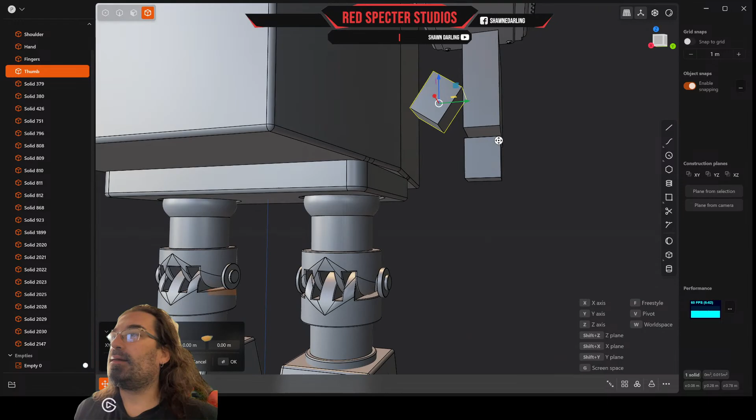Okay, that's fine there. And I think from the front I'm going to add some joint parts to this. We're going to use a two-point circle. Going to go from here to here, and I will add this onto the thumb. I think that'll be fine, and we can go to our faces, and I'm going to cue that to this, so we'll just pull that back and select the edge that it's going to snap to, like that. Great, everything's good to go.

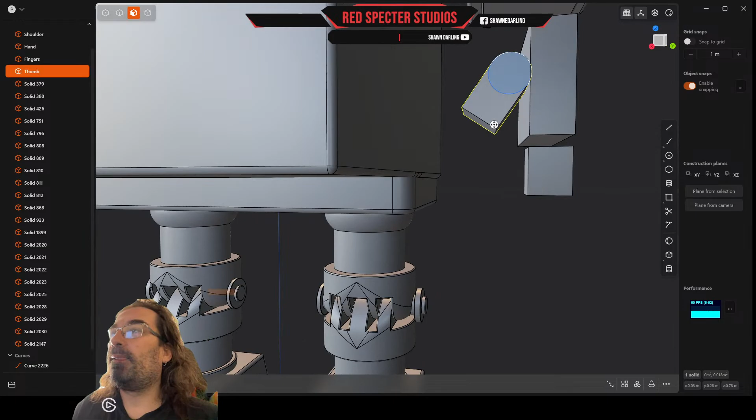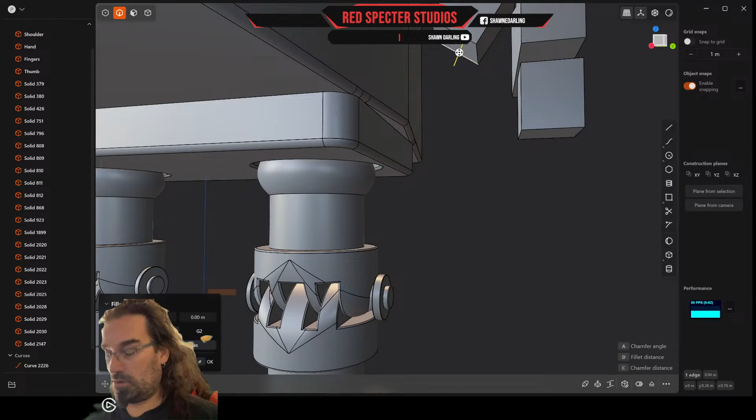And might even make this face here, let's see if it'll let me do this, but a bit smaller. Don't think I can do it that way, so I'm going to take the edges now and try to move the edges in a little bit, which it definitely lets me do. And I think if I select that one, pull that one, don't know why it's going up, must have grabbed it in the wrong direction, but pull that one in this way.

The point of that is so that I can add the circle to the bottom part here, and I guess we can do a 2 point just the same. However, got to get this to snap, which it has, and we'll now zoom back, which is in my opinion a flaw in the program, but it's fine.

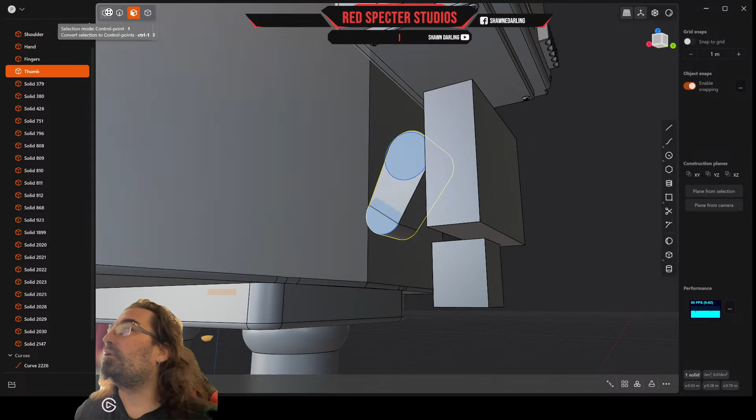And we can take this piece and we're going to cue that back using this, and we will pull that back and snap it to that far edge, and that will be done. As far as I can tell, that's good to go. It's got a little bit of an angle or something. I don't know what's going on there, but whatever works. And we will pull the curves off, I guess.

I don't really like the fact that this has a separate piece like that, so I'm going to undo. Seems like, yeah, I pushed in that edge. So I'm going to undo that like so. Then we're going to push this edge inward, leaving it flat from the front to back. I think that's okay.

And now from the front, I come in here. I'm going to get rid of this other curve. It's just distracting. We're going to take this, do a 2-point circle from here to here. Say okay to that. Zoom back out, which is my favorite. And extrude that backward. It's doing it as a separate object, but that's okay.

I will meld the two together here now. I'm going to go to Q, and say yes. And then we can get rid of this curve. And now you notice there's no line here on the front, which is what I was mainly trying to avoid.

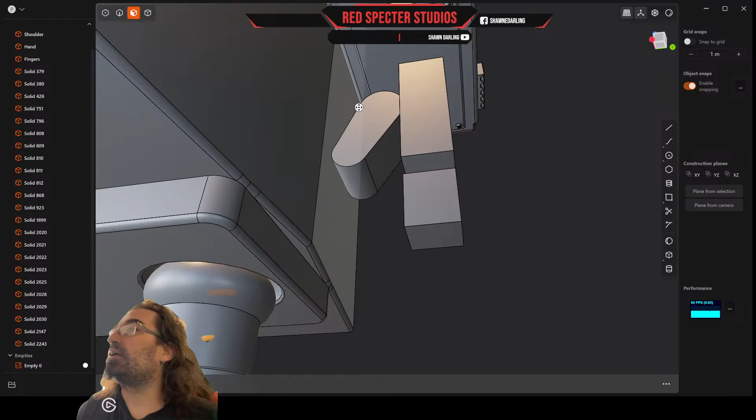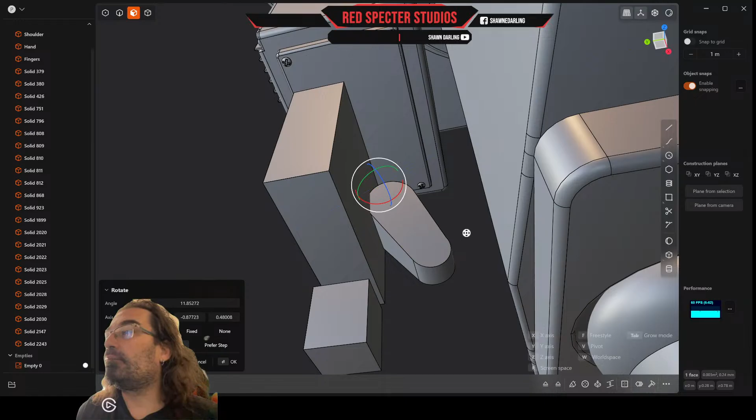Now I will tilt these in toward each other, so I can take this face here, do a rotate, V, from up here, and we can say you lean in that way, and then I can do the same on this back side. This just gives it a bit more flair. Rotate, V, and do it from this backside point as well, like that. You can see the thumb gets thinner as it goes toward the middle. That's the point of it.

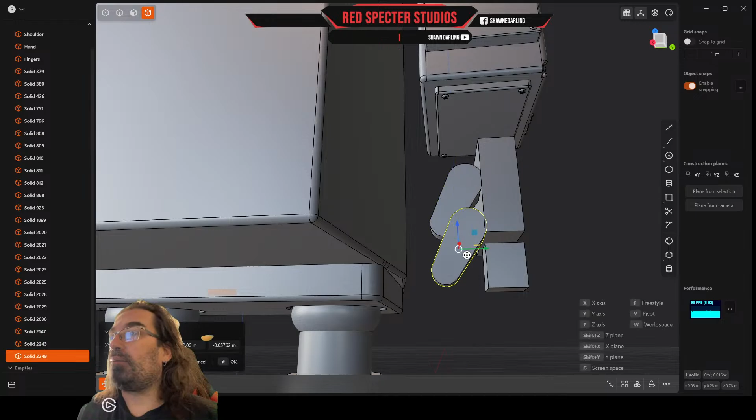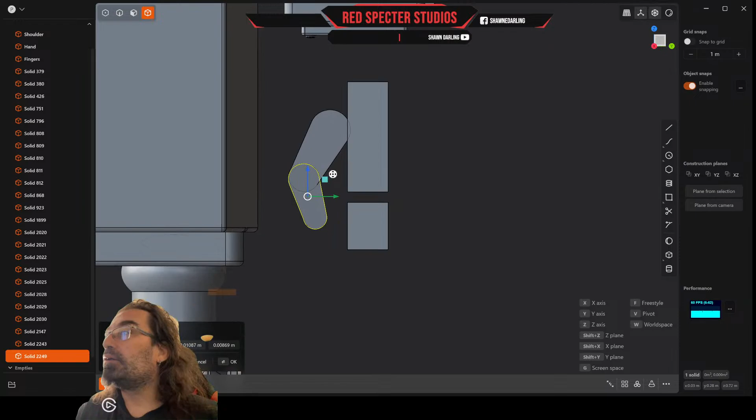And now, worry about the fillets here in a second. I want to take this piece of the thumb here. I'm going to duplicate it and pull this down and make this, just trying to save some little bit of work. Do it like so. And move this. We turn on, hopefully you can see, there we go, that's not so bad. Get as much of a real circle in there as possible, and that should be good.

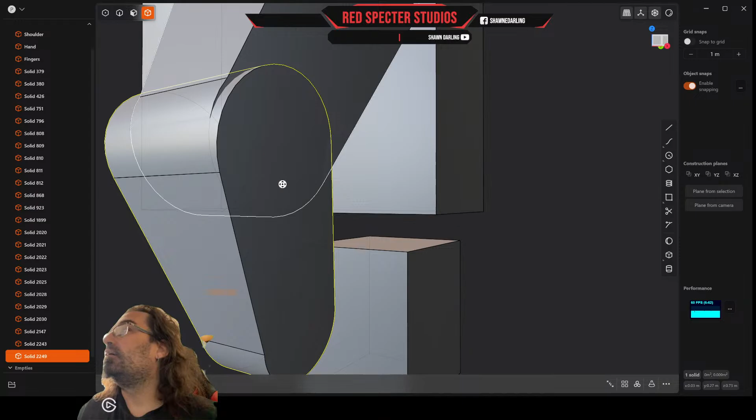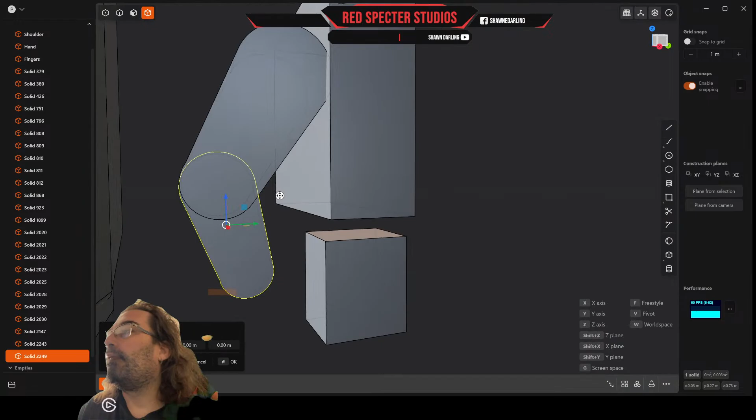And looking at it from the side here, I want to make it thinner or wider. I think we'll make it thinner this way. And then that way I can move this forward. It will sit pretty much in the middle of that piece. That looks pretty good. The front, let's just try to make that more of a circle. I think that works there. Because we're going to have to run a pin through this, and I'm just trying to get that in a more circular way. That works for me at the moment.

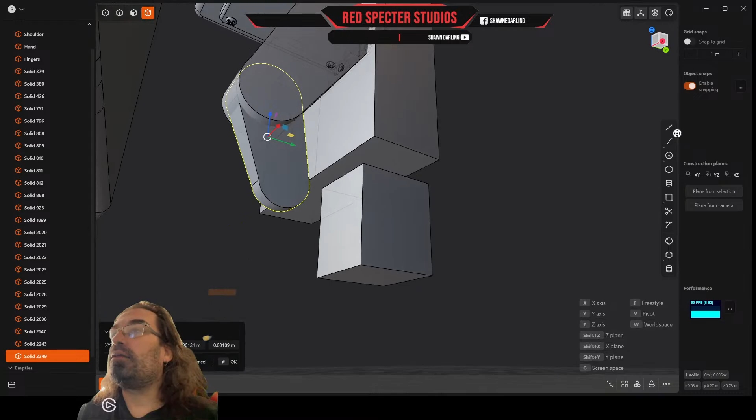Also, I think if I take a line from here to here, give that a cut, knife, and then I'll do the same on the back side here. From here to here, knife. I can draw those two faces forward and backward. Let's see if that works with just an offset. That actually isn't bad. I was just going to do the tip of the finger, but I think the circle's kind of cool. We'll do that.

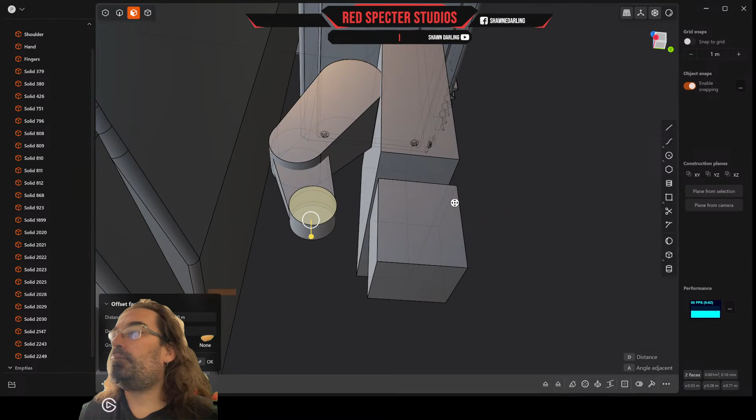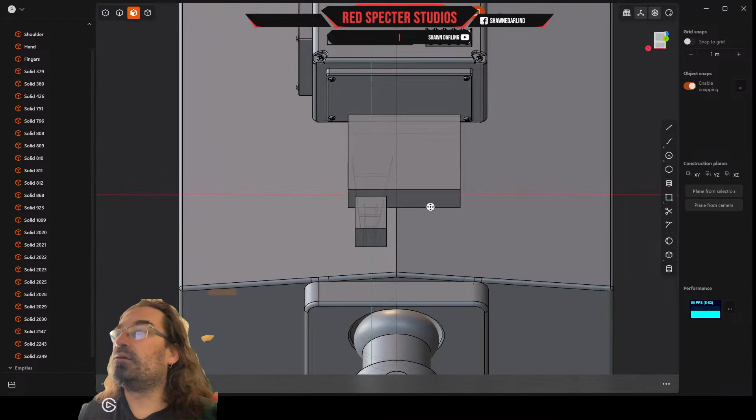We'll worry about anything else involving that here in a second, but what I want to do is carve out a slot for this thumb to fit in, and to do that I'm going to have to create a rectangle that runs off of that face. Let's see if I can even see that. Probably not. Let's just cut it anyway. I'm going to go a little bit up and outside of the actual piece that's there, and something like that. I hope that looks somewhat correct. I think so. We will have to size this now this way and move this down some. Hopefully that will be enough.

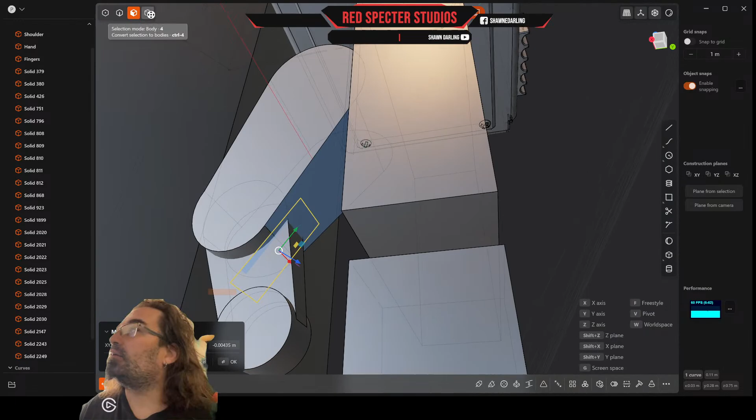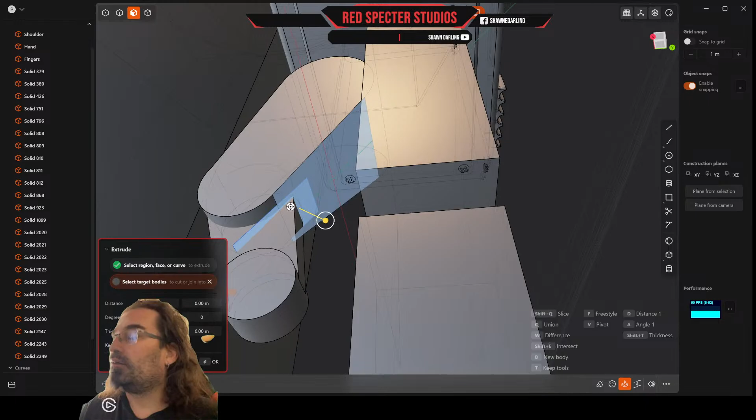Point of this is we're going to extrude that face. If I can grab it here, this face and this face is going to extrude through that. So W, use this as our target body, I hope. Pull that through. That is not what we want. So what we want is that. Extrude, W. Why won't it pick that body? Let's escape. Let's take those two faces now. It's curved, so we need to grab the curve, move that out away from it, and this should give us the ability to do what I was trying to do. We just select this, W, why won't it select that body? Very strange. Remove the plane. Okay, cancel.

Weird. It usually doesn't have this problem, but let's grab the curve, move it completely off any other objects. Maybe that's it. I don't know. And of course now it's not going to move it according to that plane. This should just work. I don't understand. So if I go through, okay, that's not working. So we're going to select this body. This should totally work. I don't understand. Probably can't cut with this curve, can we? Well, it says we can.

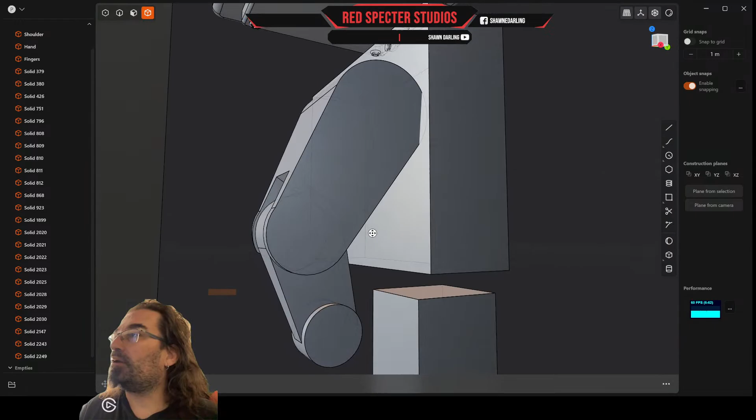Let's just do it. Delete all the pieces, and that works just fine. That's what we want. That looks like it clipped just barely, but you know what? I can probably offset this face really slightly in there. There you go. We got plenty of room for everything. So that's how that needed to be done. We're going to have to do essentially the same thing to this piece once we get our joint built up here, which shouldn't be too difficult, I'm hoping.

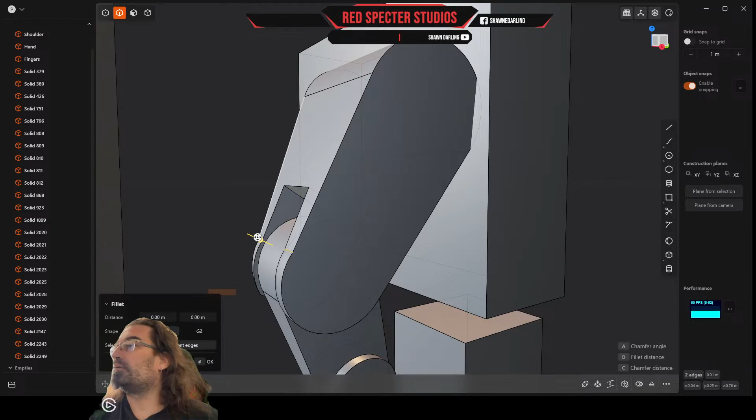And these edges could probably be beveled out slightly, just like that, to make them smooth. Those are already smooth and tangent in the front.

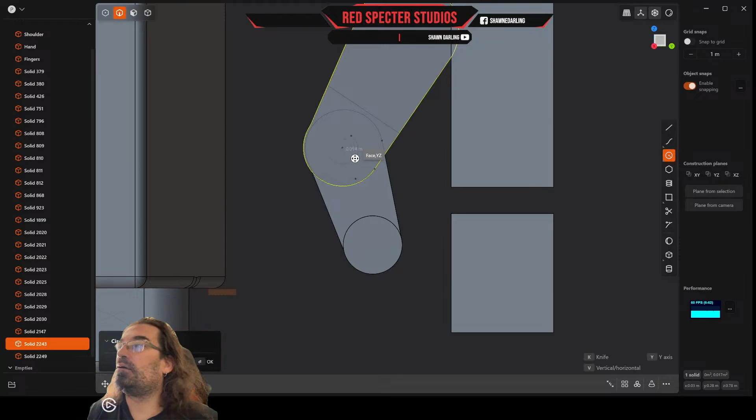Okay, so let's work on the thumb joint here. We're just going to drill a hole here for a pin. So this is going to be about that big. Works for me. Going to not delete that curve for starters. We're going to move it out in front. Going to take the face. Well, actually, yeah, we're going to take the face. We're going to go W, and then we're going to select this object and this object and pull that through. And now we have the hole through everything.

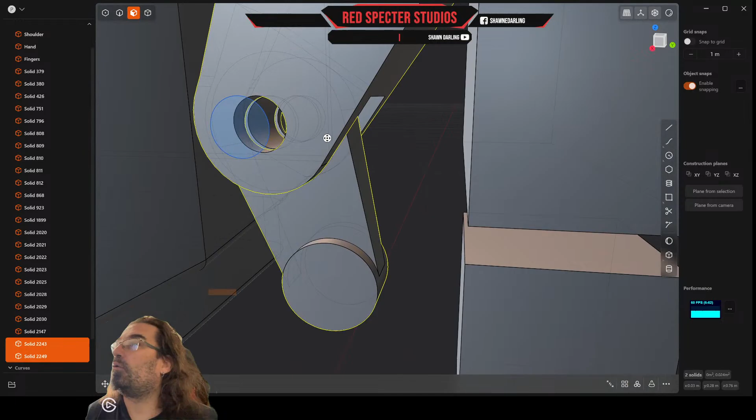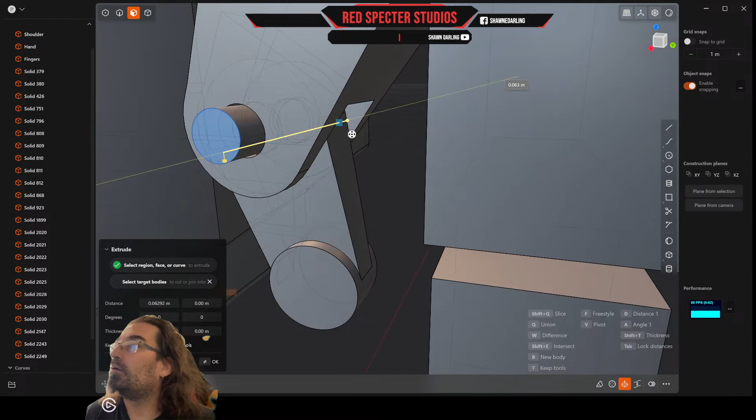Then we're going to take that curve, make it slightly smaller, SS, a little bit smaller. There you go. And we're going to extrude that as a new body through everything like so. And then I can work on the length of it after the fact. We don't want an extrude, so therefore we need to get rid of that curve and just offset the ends essentially like so. And this one to the same approximate distance there.

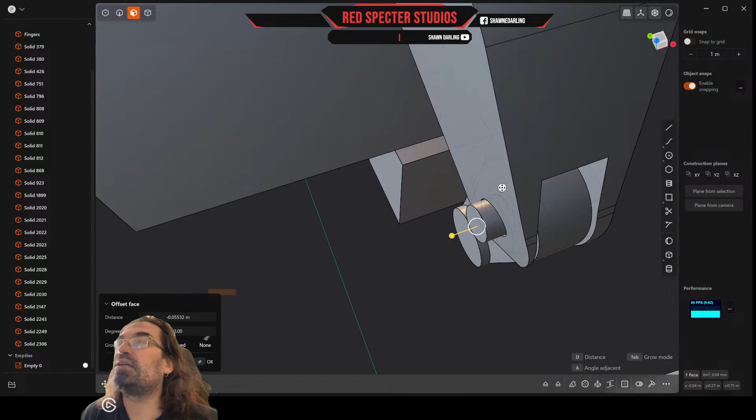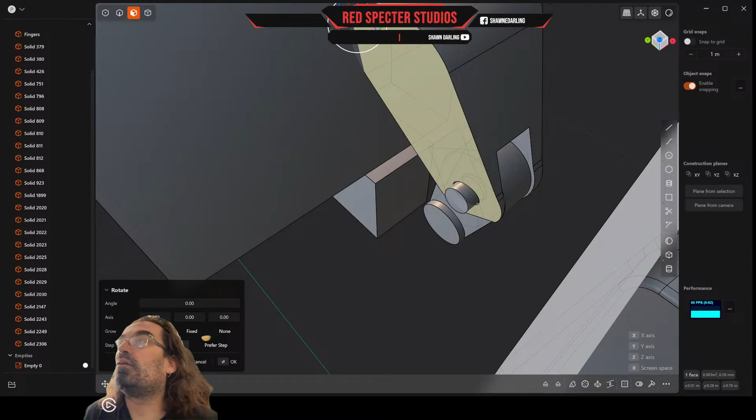It's looking like, ooh man, I chopped my finger there a little bit too much, so I'm going to see if this program, being as cool as it is, will fix this, and I think it will, by allowing me to angle that back out. We'll see. This will be a good test. So I'm going to go like this. I'm going to rotate this, and we're going to go from a custom rotation point. Let's try that right there, and we'll just rotate.

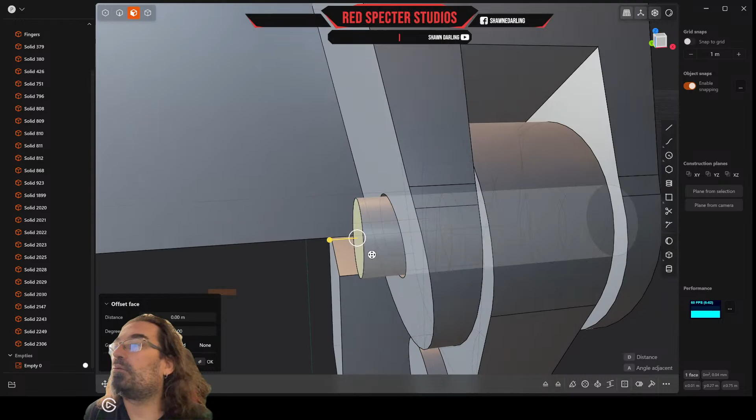Look at that. I brought the thickness of that joint right back to this bottom piece where it was cut off. How awesome was that? Yep, I'm in love. Okay, that saved that, made it perfect. Let's go ahead and pull that out so we can do what we need. We're going to offset this curve here inward to there. And we're going to offset this curve inward to there.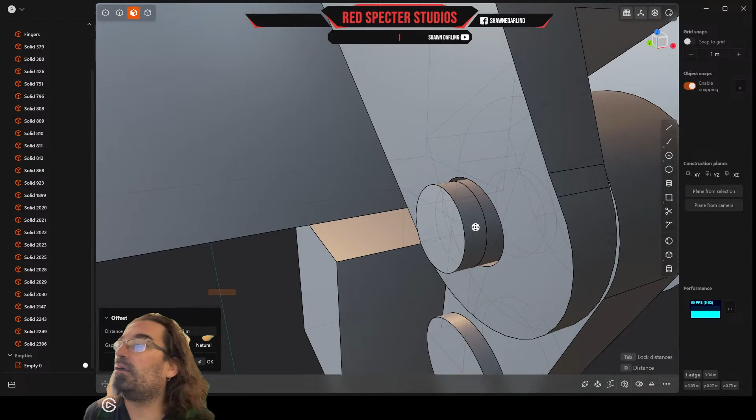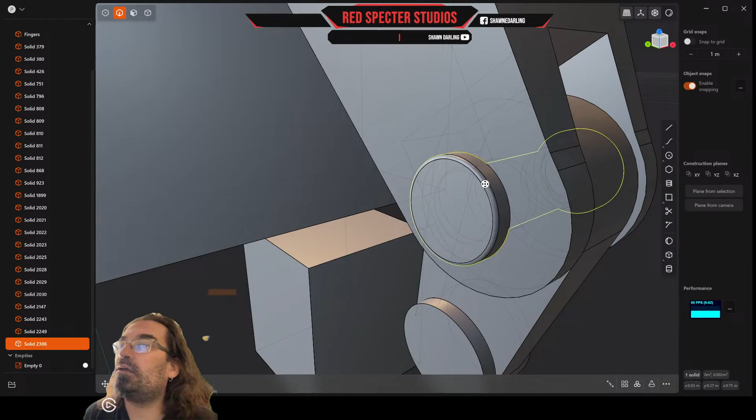Perfect. And we're going to select the face here and the face here, and we're going to offset those out to create our heads of those pins. And then all we got to do is our fillets on those, and we're good. Let's just go ahead and chamfer or fillet the inside. I say go ahead and fillet those. Why not? Cool. And works for me.

Maybe a little detail in the middle. We don't need another circle. We can actually just offset this edge toward the center. We'll do the same thing on the back side at the same time. So we just go O and go up. It's not going to let us do them at the same time. That's cool. We'll go here, O, something like that in the center. I just want to get the other one approximately the same size. Come on.

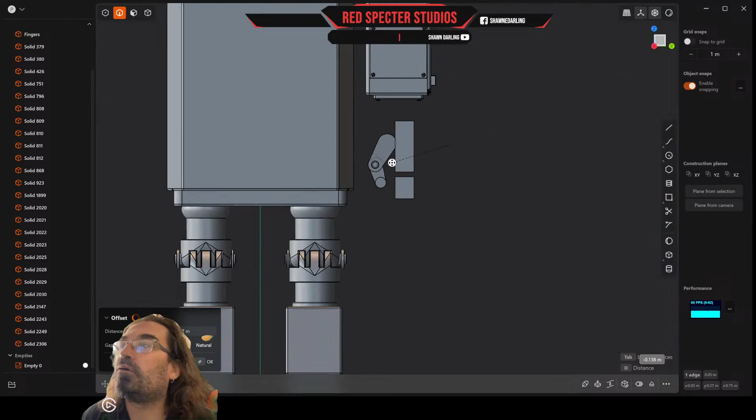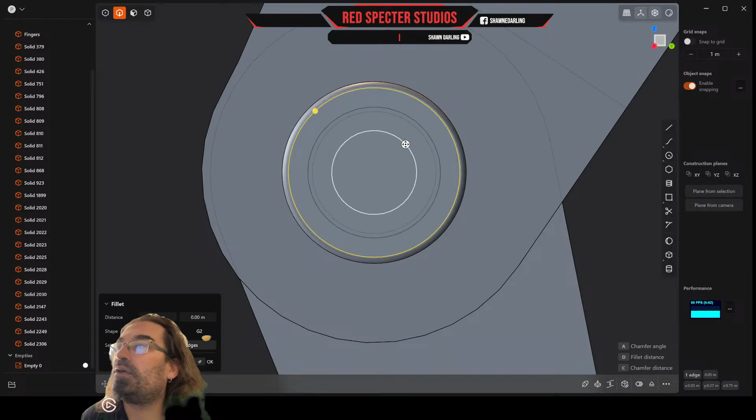So we'll select this edge, O, about like that. In fact, we can look through here if we need to. I will undo that offset. Oops. And have a look. I need to also turn off my see-through for the moment, because we're going to offset this ring. That should be to this. Yeah, it should be to that. So offset that one to, I think we can snap. Nope, we can't. To there. Looks great.

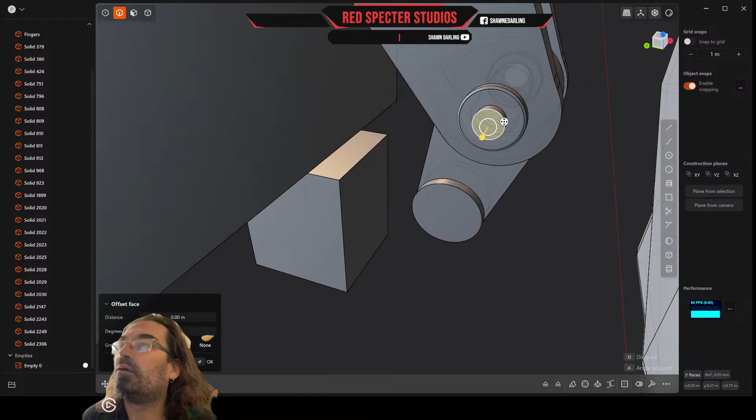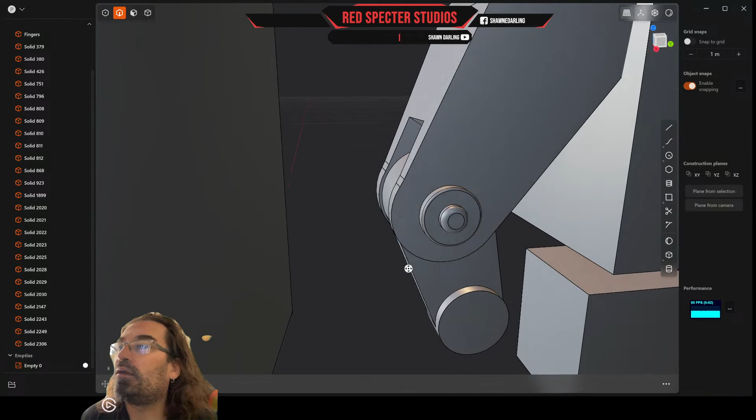And now with those both offset, man, that zooming thing is killing me again. I can select the faces, front and back, and pull those out, and then select their edges. I should turn off my, there we go, and even make those have kind of a much roundier point there, and that should all be one object now. Yes, and yes, that pin is finished.

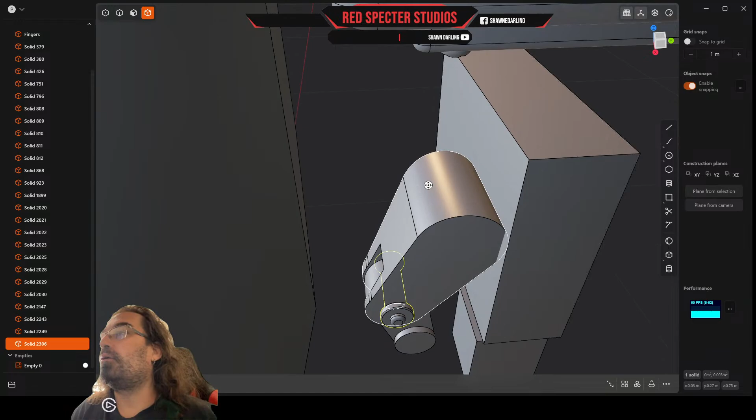Okay, so let's make the fingers cool. I need to put another 1 or 2 slots here. I'm going to go with 1. It's going to save lots of time to do it that way. So I'm just going to draw a rectangle. Let's do a central rectangle right here.

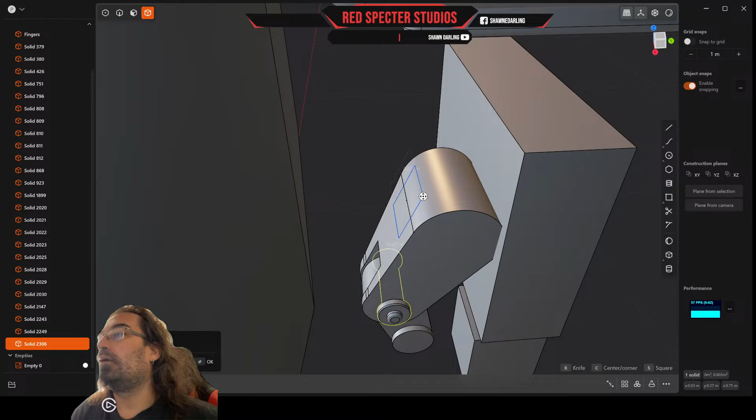And if I need to, I can move that up. Oh, you know what, you can. Let's move that like so. That should be enough. And then we can take the face that we just created and we can difference that against that and pull this all the way through. And it wasn't enough, so hang on.

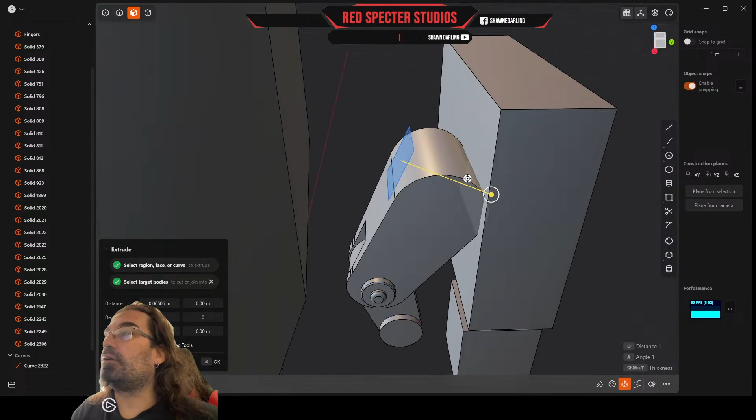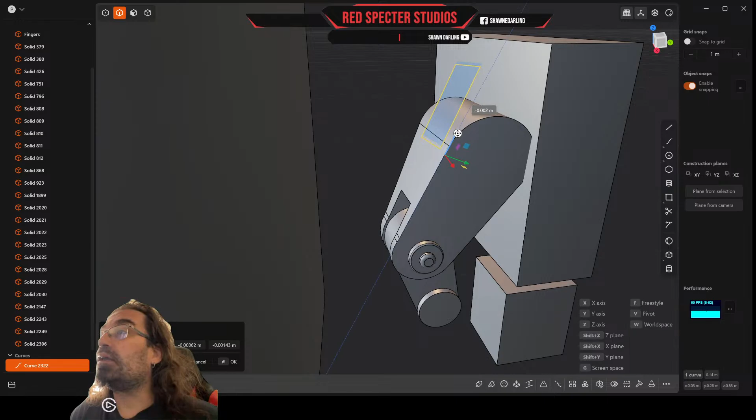We will take that curve again and move it. Whoops, that's material. And move it. We have to do the, there we go, the custom. That should be fine. I think I'm going to scale it some more as well. So scale V, we're going to scale on that same axis there. There we go. I'm going to move it again. We're going to do it on this axis again, because I think I need to be below this a bit.

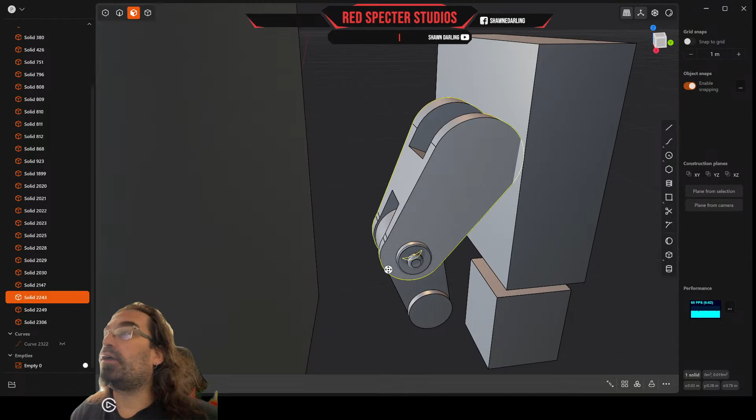And then I can W, select this and pull it through. That should be all it needs, we're hoping. I'm just going to save that curve for now, turn it off in case I need it. And then I need to make a piece that sticks out and basically becomes the central part of that. I'm wondering if I should do the hole first, just so I get a central location on that.

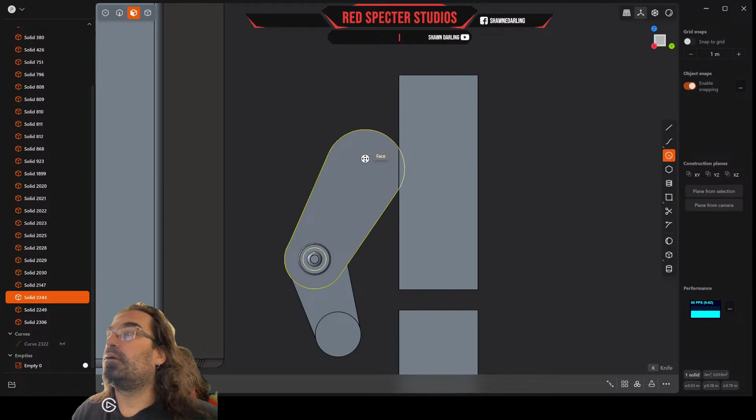Snapping is on, so how come I'm not getting a snap to that curve? He wondered. That's okay. It might be coming on. Well, I don't think so, because there is nothing snapping in the center. Okay, so is there anything that'll snap to the center? Because that's really what I need to have happen here. That might be because that's in an angle. Yeah, that's probably what it is. So from front view, nothing will snap because there's nothing perpendicular to the camera, parallel to the camera.

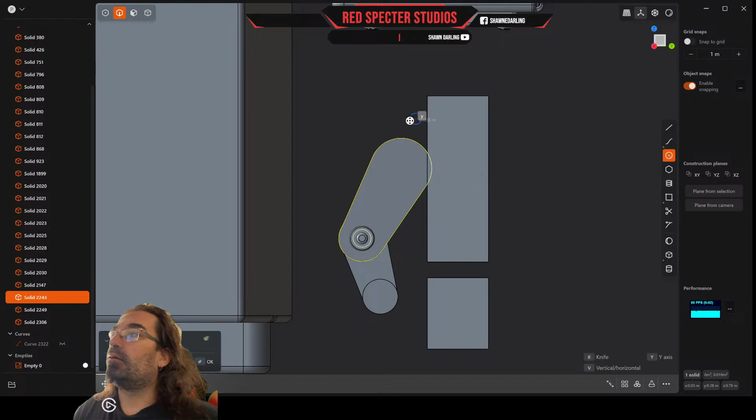So I may have to say, and this may throw off the whole thing. Nope, can't do it that way. Okay, so what is in there? I can do an offset of this edge and then continue from there, I guess. We can try that. So looking from the front, I'm just going to select, oops, undo. If I make an offset of this edge inward to where about my pin's going to be, let's do it like that. I'm just worried that it's going to be hitting the bottom of that area, but that might work.

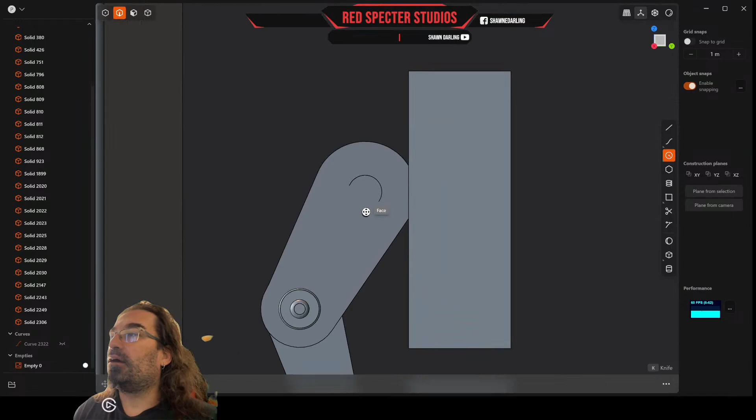We'll check it out. And I put that there just so I can use the center of it as a guide. I don't know if that will also make a guide for me, but it will not. But I can do this, which means I can find the middle of this line. I can come down to the middle of this line, and now I do have a center. In fact, I can also go from here to here, and with that I can place my center there if I wanted to. And let's just say I make that post about that big on this finger.

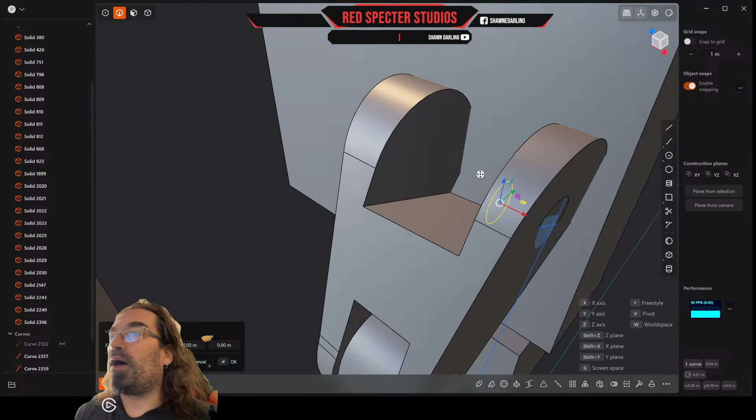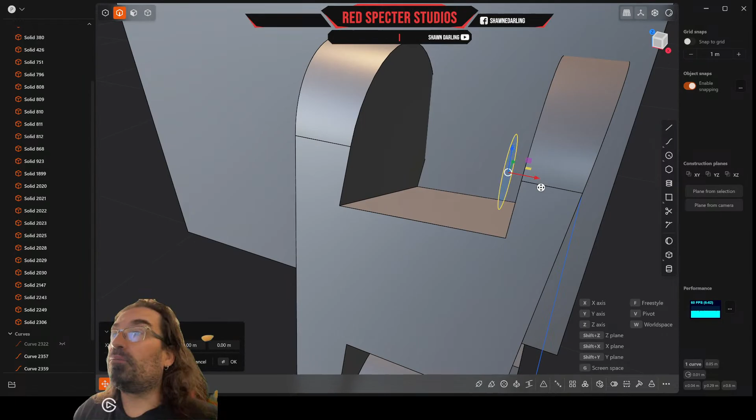And let me back up here to see where we're going to wind up on everything. I think that's going to be more than okay. I'm going to grab this. If you can see, it's not going to intersect. And this is what I was worried about, it intersecting with the bottom. So I think that can even be bigger because it's not going to touch that bottom. So SS, move that out to where we've got clearance there, and we will pull this forward. So now I know that that will work. If I wanted my pin that large, we could do that. I think that's fine.

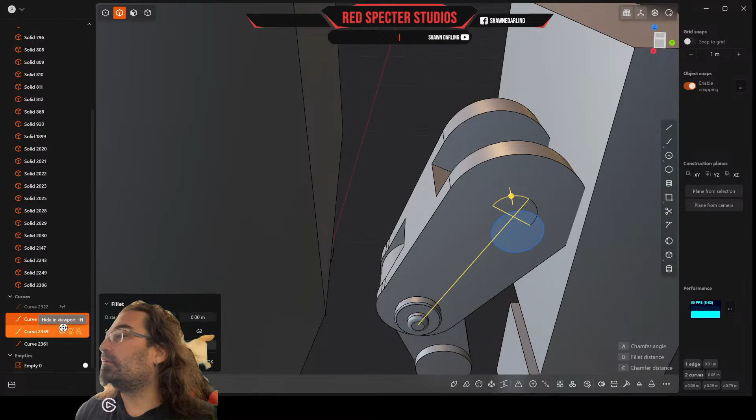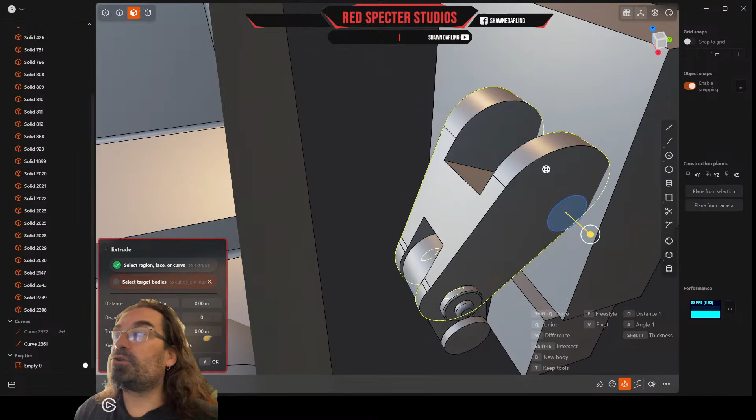All right, so all these other helpers here can now go away. Let's see. That's the curve I don't want to get rid of. These two I can. And what's up with these? Those two can go away. And then this, being placed correctly now, we're going to subtract from this and just pull right through. That's okay, I guess. You know what? I don't want it there, though. I actually want that higher up.

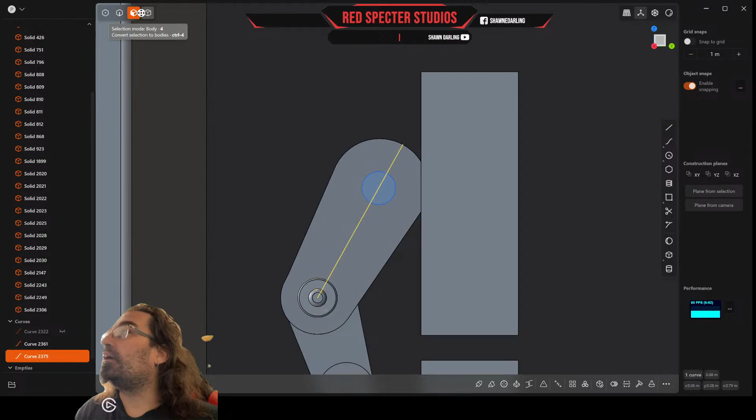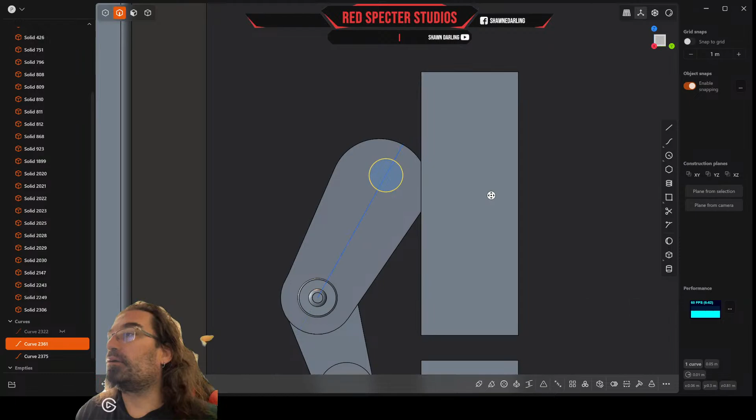So with that being the case, I will make this line again. I will take this curve now, and I will move it, grab, and we're going to use a custom move line. So we'll use this line. And so now when we move this up, there we go. Perfect. It's a little toward the top, but I like it better. We can now get rid of this other line. It was a great help. Thank you, bud. And we're going to select this face. Let me zoom out so I can see what we're doing.

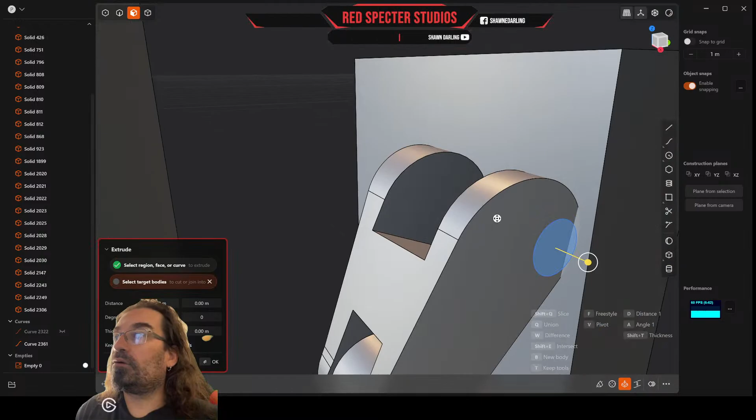W, select this guy, pull this all the way through, and now we have the hole where I wanted it. We can get rid of the curve, and we're good to go.

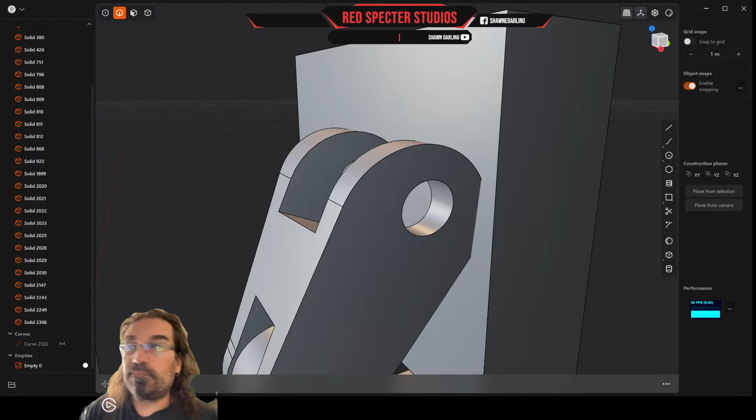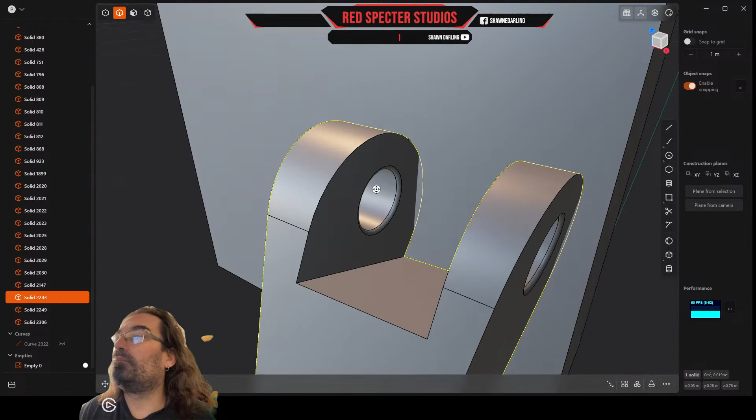I'm going to do some fillets on these curves. I don't think they'll be seen, but it's good to be thorough. We'll do those like so. I'm going to leave that for the moment. And now we need our pin for here. Perhaps I can borrow the pin we already created, which would be cool.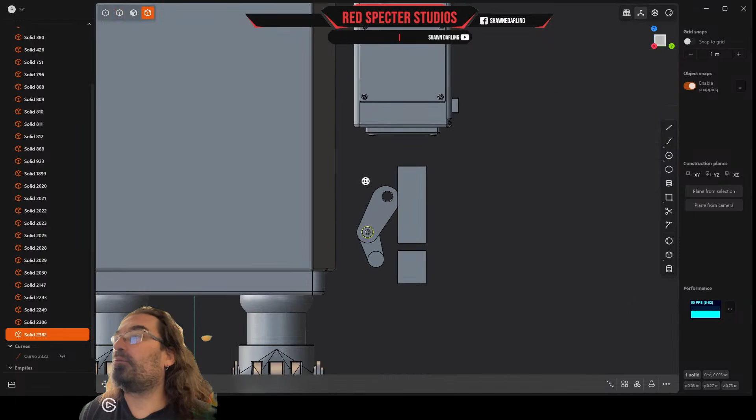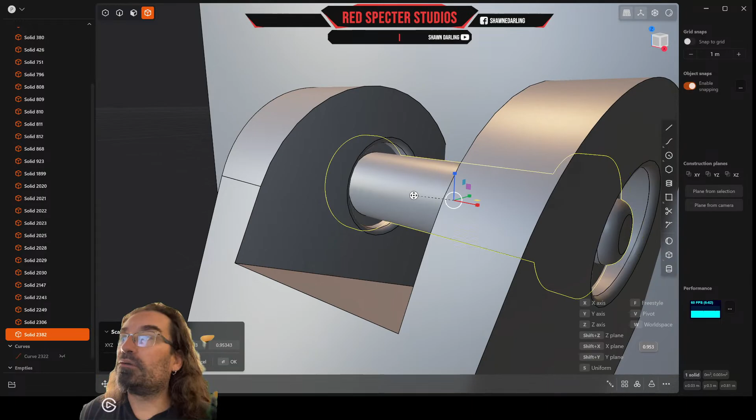So we will Shift D that. From the front now, I'm just going to grab it and try to move this. It's trying to snap to the edge, which I don't really want. Close enough there. The whole thing looks like it could be bigger, so we'll scale that to here.

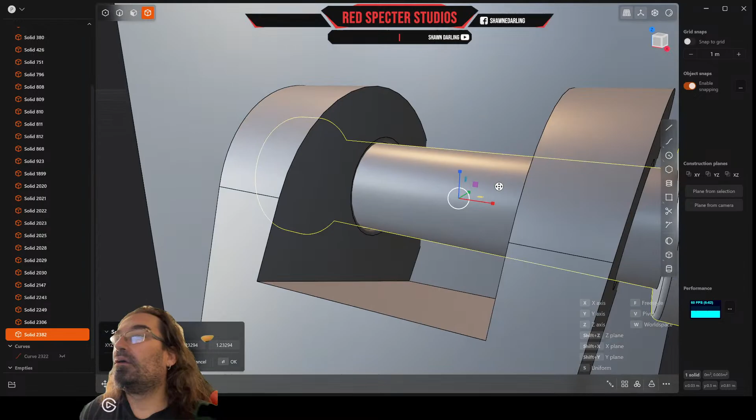Let's scale it down just a little bit now to where I can see like this. Then we will scale it out to some degree. The ends are not correct, but maybe I can manage those. We're going to grab it, move it this way, and then scale it in slightly. And I think we just live with that. Cool.

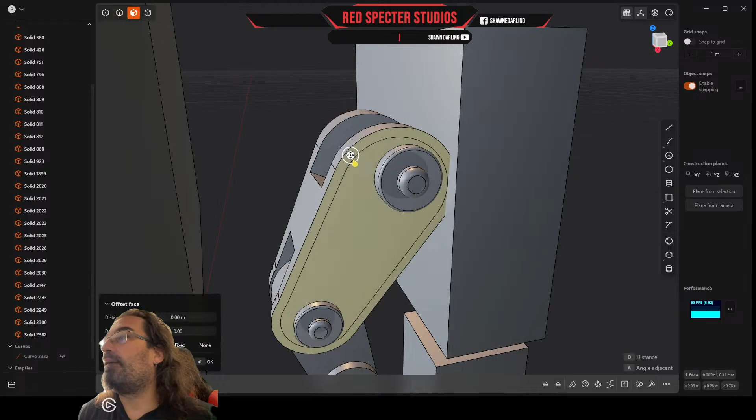And then I think, just to dress the fingers up a little bit, or the thumb, I'm going to inset a ridge here, an edge. I'm going to take that face that was just created from that, which it's not working that way, strangely enough. I don't know why. Why would that be the case? He wondered to himself. I don't know why, actually. Maybe we'll do this one side at a time.

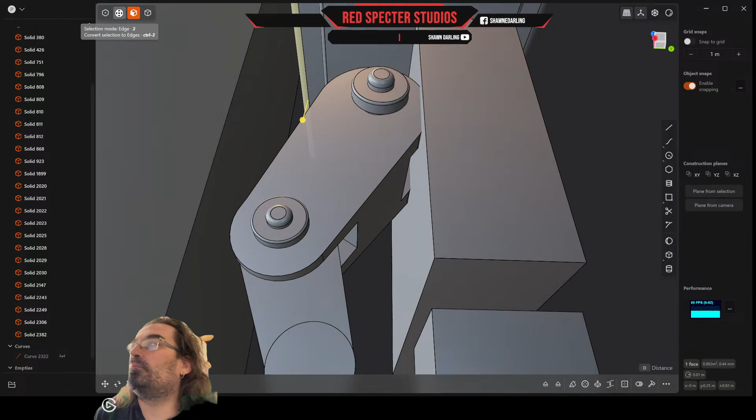I'm talking too much. My voice is getting shot.

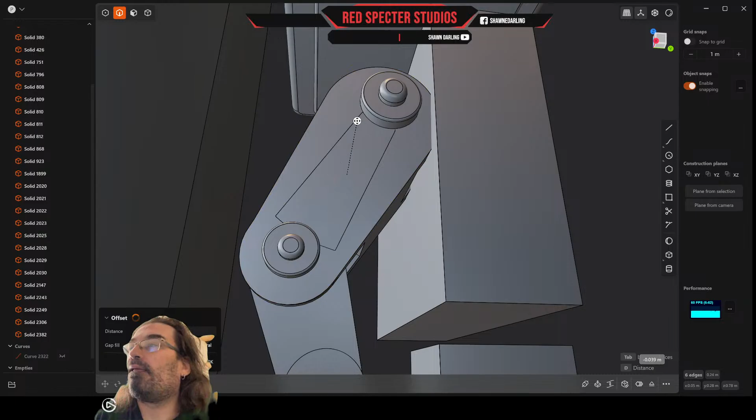Let's try this just on the one side. I don't know what just happened there. I selected a face I didn't mean to. We will select this face. We will inset it. And suddenly it's not insetting. I don't know why. I only want to inset this particular edge I've got here. Never had this problem before. It's working now though, so that's what counts.

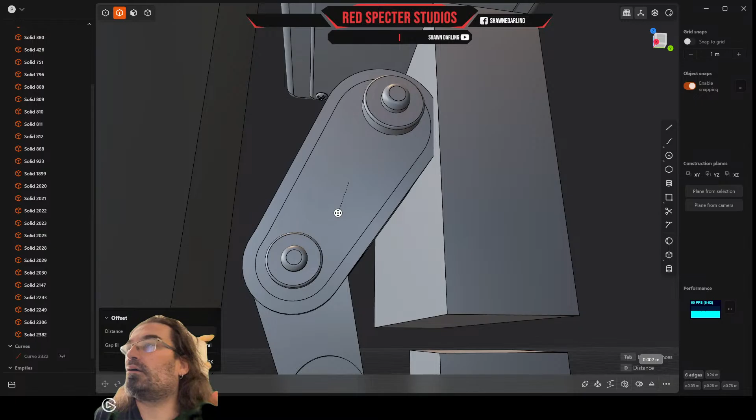Oh, come on. It's being really, really touchy and weird. Okay, I guess that's okay. We say okay. I don't know if that's going to let me select a face. Now it is finally, thank goodness, before I freaked out. And we're going to probably offset that face out like this.

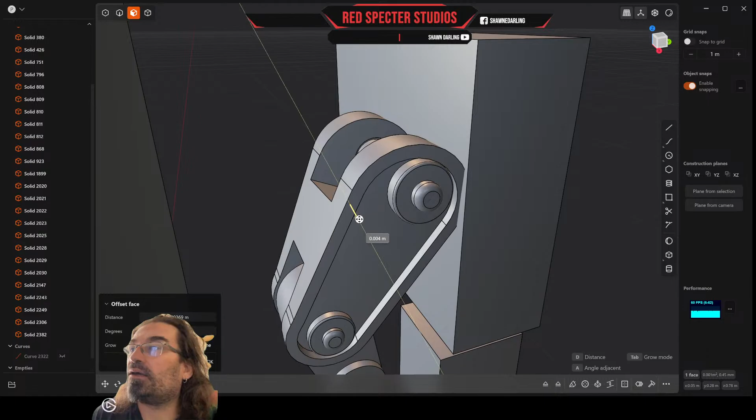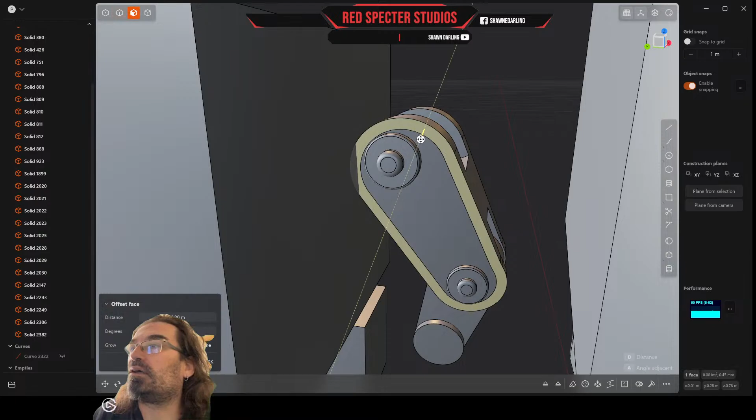And now we're going to try and do the same with this side. Just grab the edge. Don't know why that's doing over here. We don't want that. We only want this edge. And I'm going to offset to there-ish. Now we can grab this face and offset that. Yep, looks all right. And then now I'm going to take those edges.

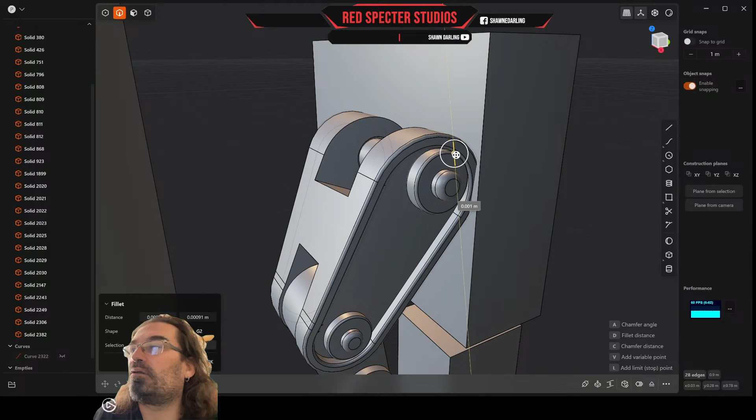See if I can fillet everything at the same time, which would be nice. I guess it's little things like that, there we go, that don't always work, but this time they did. Alright, so we have to make a central section that goes around that. For the moment though, I am going to go ahead and fillet these. There we go. And then the bottom ones as well.

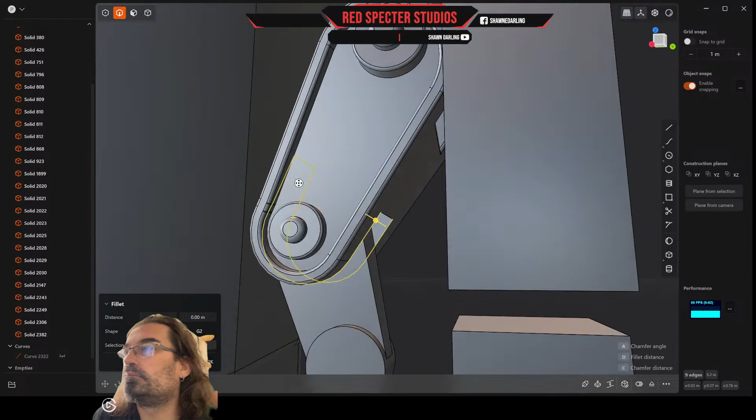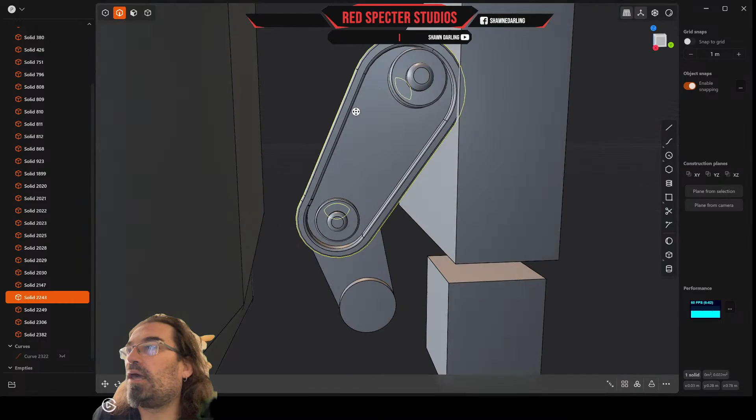Can even fillet the inner edges a little bit if we want, just to nicen those up a little bit. There we go, looking good. That's a nice, healthy looking thumb piece, if I do say so myself. Alright, so now

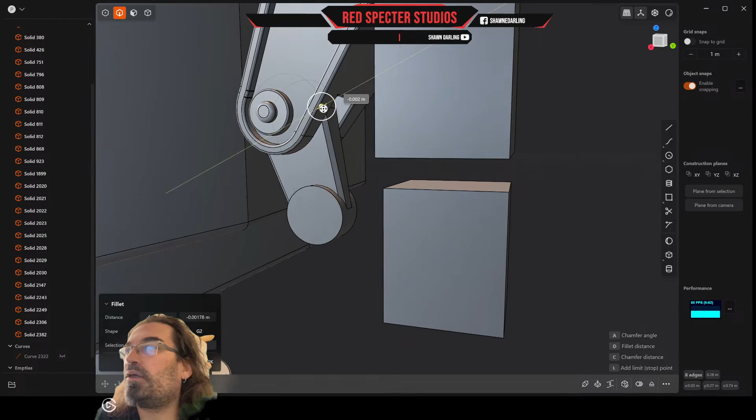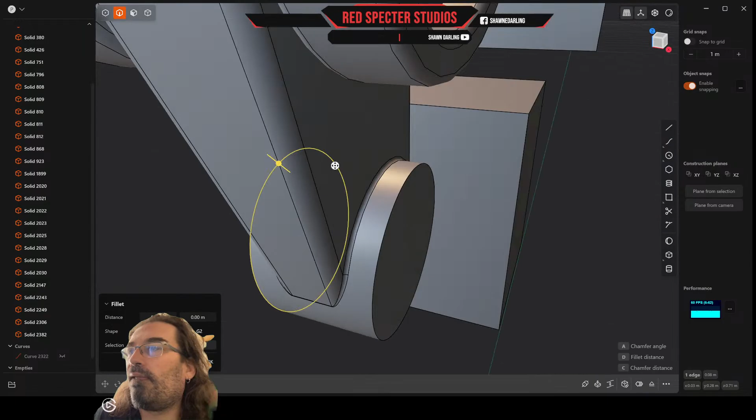probably select these outer edges, if it'll let me, and fillet those a little bit. These should fillet without a problem. We'll just do those as an outer fillet, like that. And then these will get their own, just to give them a little bit of an edge there.

I think that works. I may or may not go back and put a disc or something in the middle of that. We'll see. But that is the thumb. So now I need to do the hand with the beginning of the thumb joint on it. So cool.